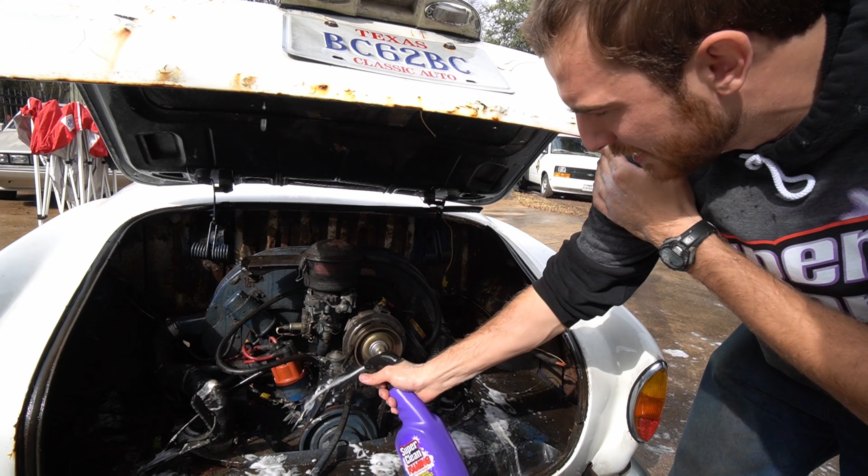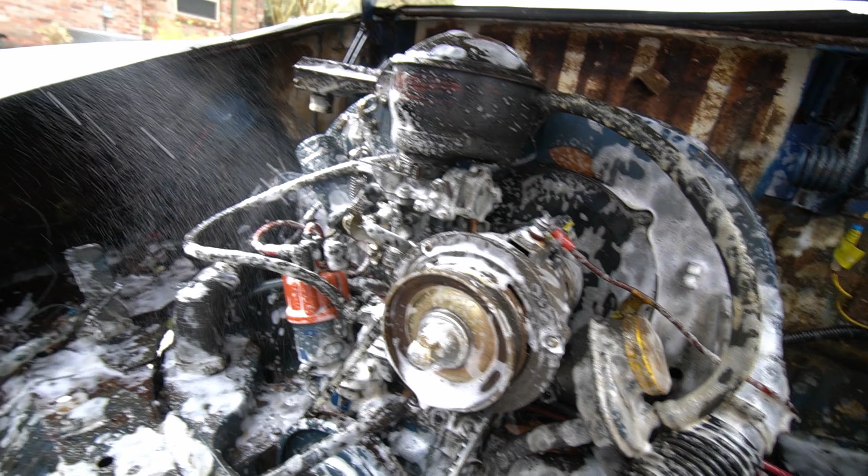Look at that. Tommy's alright to spray the motor. Do it. Don't go light. Let's just super clean the hell out of it, foam that bad boy up. It's foaming up, turning brown. See it? Yeah, that stuff is working. Yep. We're getting it super clean. We let it set for a second and then spray it down. That's coming off. Better air than that.

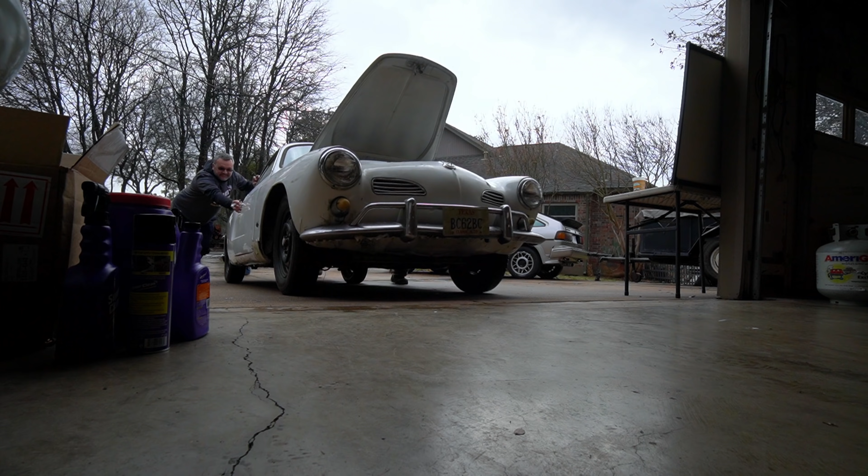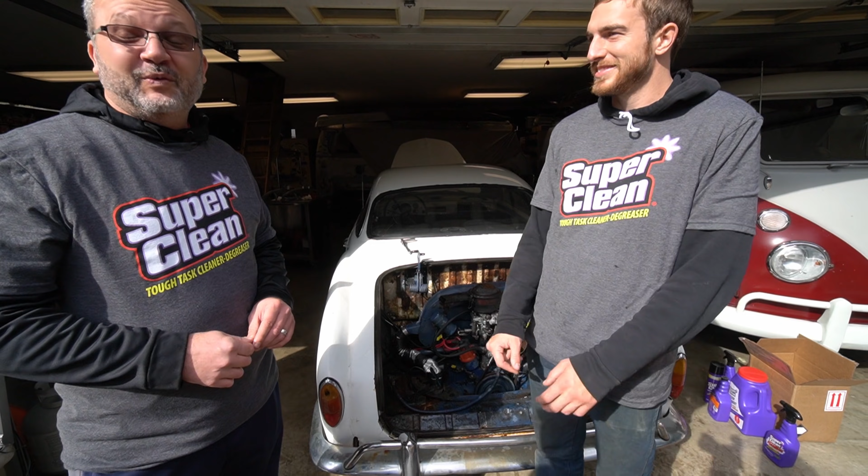It's been 20 years since it's ran. Is that what we figured out? Yeah. 20 years since it had a bath and since it ran. Yeah. We did give it a bath. First things first, we need to see if it's timed, right? No, I think the main thing that we should always do when you walk up to a car is just to see if the motor will turn over. So if we can turn it over a few full turns without any kind of problems, we're at least step one in the right direction.

So with this being aftermarket, I assume it's a 19 millimeter, 3/4? Yeah, something like that. And you could also just grab both of the belts and move it yourself. Yeah, maybe. Speaking from missing a digit, short finger, I stay away from the pulleys. Tommy's not a belt grabber person. So we are doing this why? We're going to see if the motor turns over, because if it doesn't turn over, we have a whole different problem.

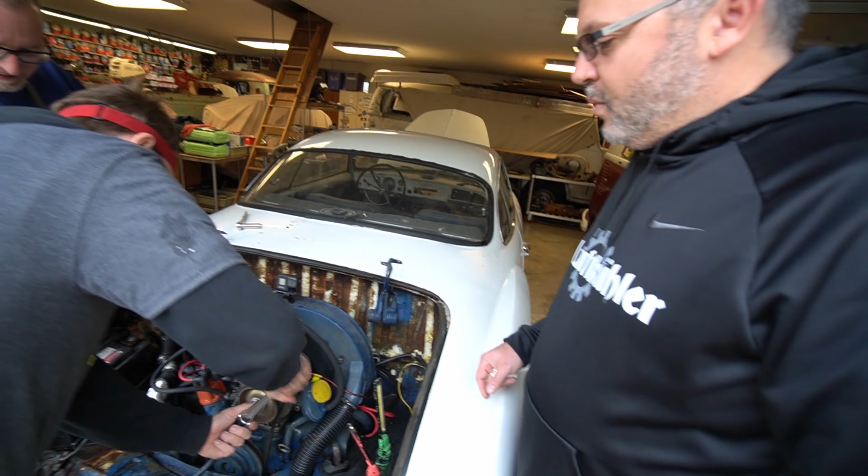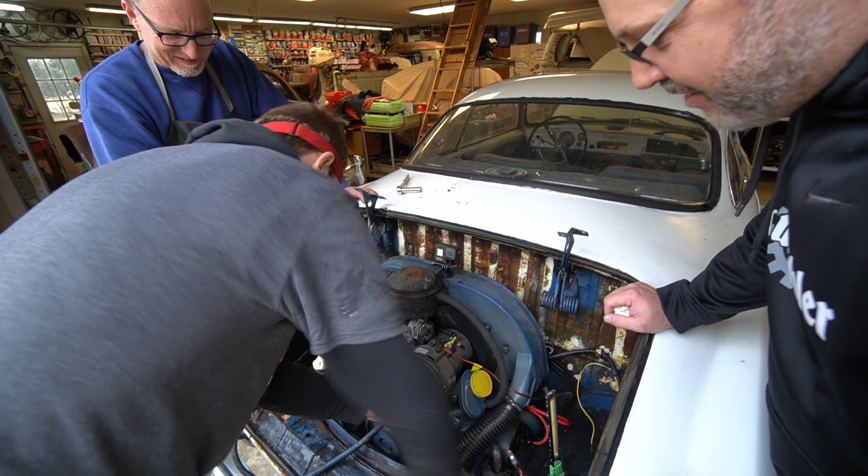So look at that. Oh, it's got compression. It does. That's always good news. We're doing really, really good right now. So Tommy, how do you know? What's the sign that it's got compression there? Well, it kicked over, so it built up the pressure, and then when it releases it shoves the... there it goes right there. So Jake's kind of cranking, all of a sudden it gets easy right there. So that's a great sign, isn't it? It is. So we're really good. We're moving forward. Let's go over exactly what it is we have here.

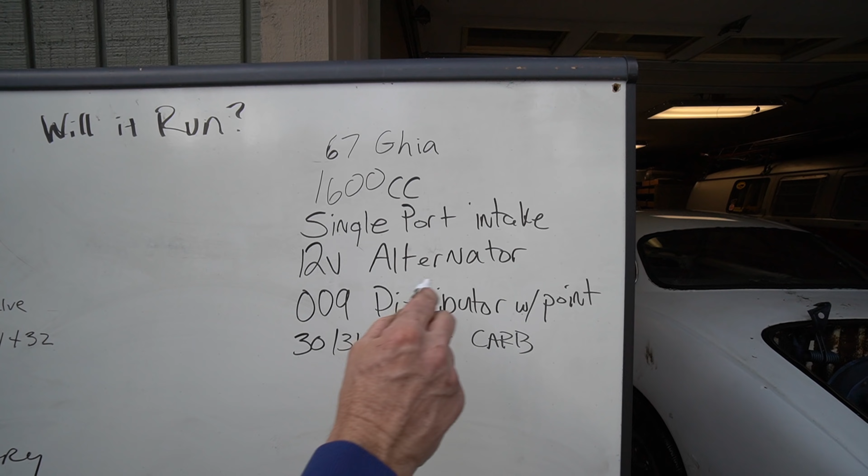We have a '67 Ghia, a 1600 single port, got a 12-volt alternator, 009s with points, and a 30/31 carb. So far we checked off rotating our motor. Next we're going to make sure we got oil in it, and we're going to see where we are with the valves, make sure everything's moving there.

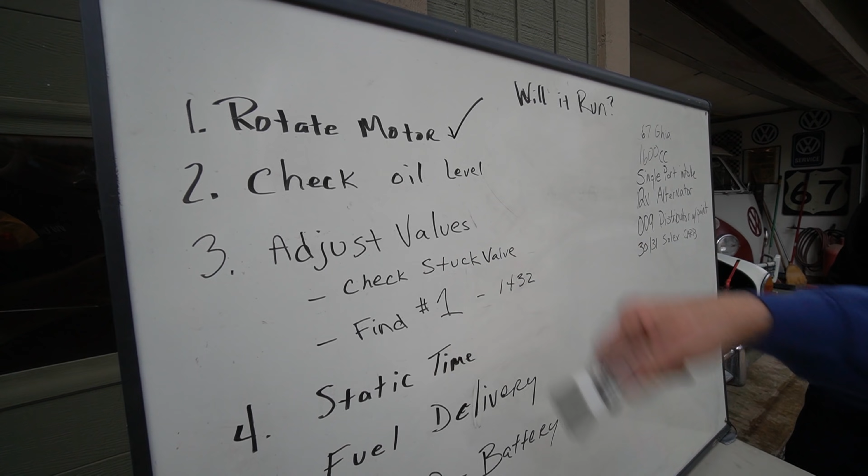Checking for oil, boss. Hopefully it's not brown. Whoa, it's got a lot of oil. It's got a lot of oil in it because we're up really high. We can wipe it up and see exactly where it's at. Holy moly. High school Jake level right there. Yeah, and it's also telling us it's relatively clean because it's not black.

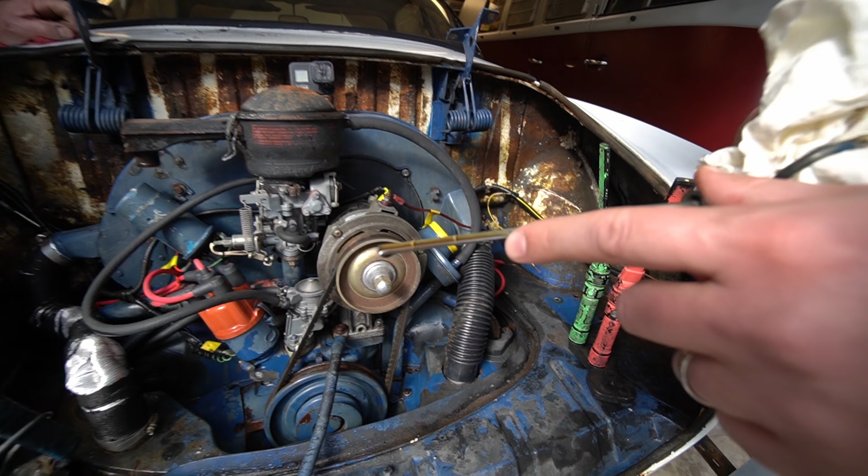And if it was black, that would be from the carbon buildup off the walls, and usually heavily scored or low compression motors will have a lot of it because there's a lot of blow by. And it's not brown or milkshake looking, because that means it didn't have water in it. Milkshake would have water in it. You could always smell it, see if there's a lot of gas that got down in there. You could touch your nose with it.

Tommy, hey, right here, Tommy. You got. Oh my gosh.

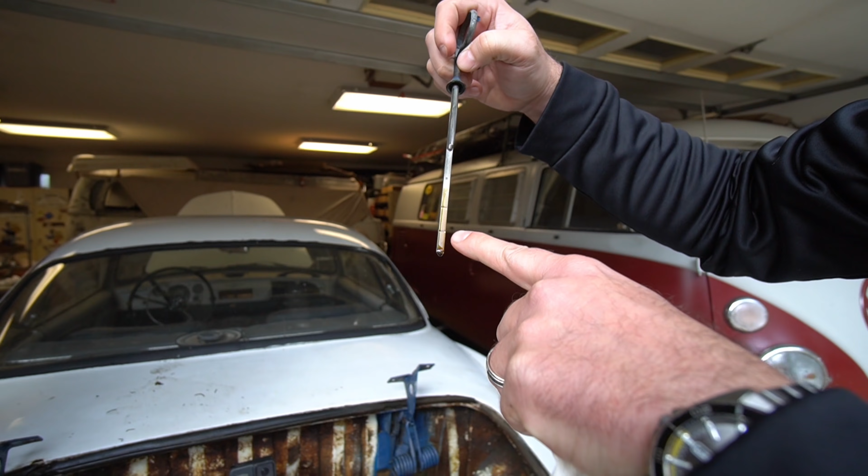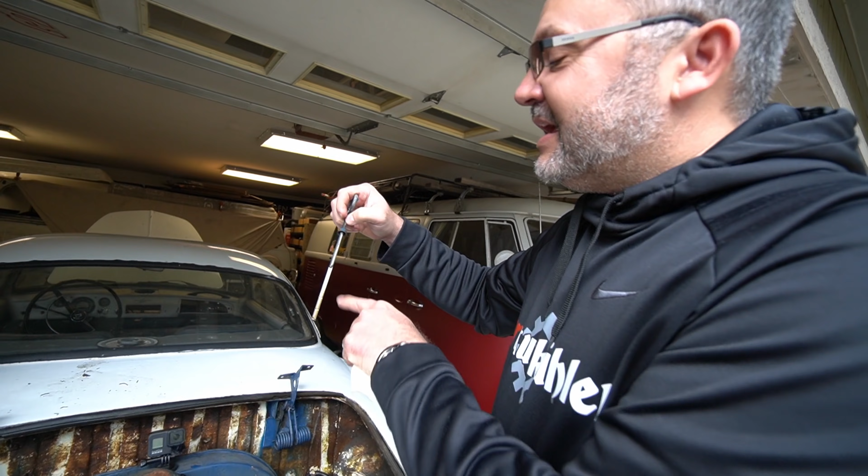So we're looking good. Basically, the oil has a clear color to it. It's not milky white and it's not over dirty, and it's high enough to where it's not too low. So here's low and here's high and here's where we are. So at the end of the day, it's got a lot of oil in it. Better to have more oil than no oil. Yeah, so that's a good sign.

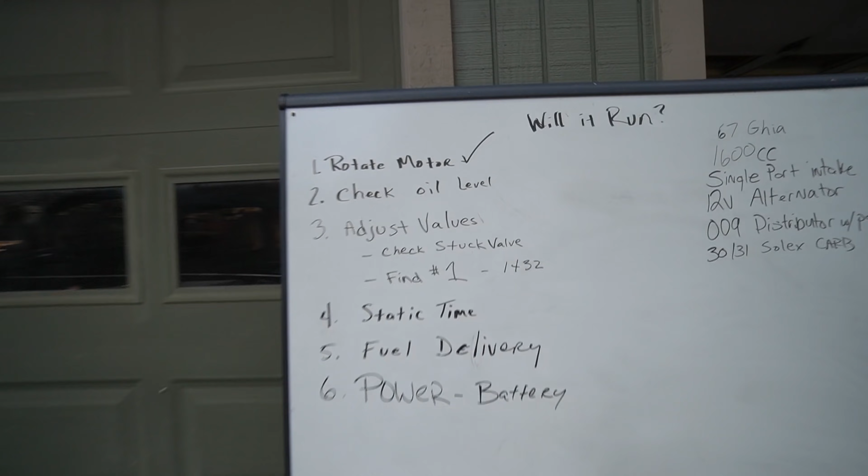All right, we're looking good. Step 2, we can check off on our box. Step 2, check oil. Wow, we're cruising along really quick on this. We are. We're like pros.

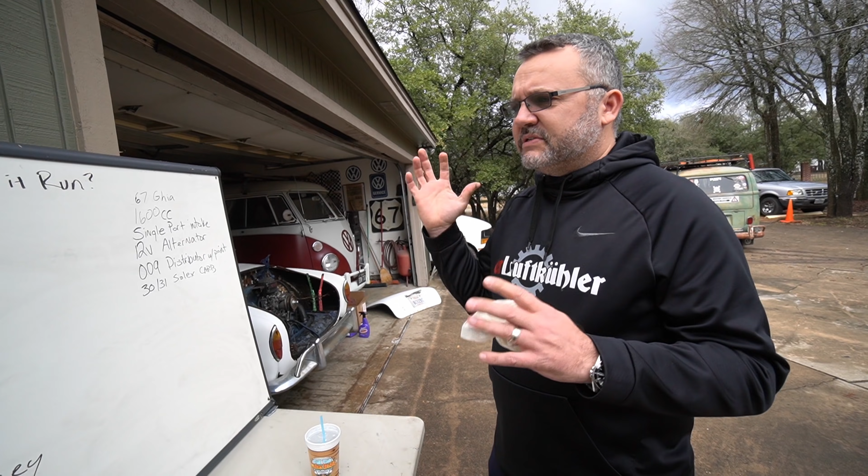So why do we want to adjust valves? We want to watch all the valves function, because sometimes there could be a stuck valve. And if it's stuck, we're going to have low compression or no compression in that. It could also be stuck and the piston come up and hit the valve, and that could be a problem. And then we're also going to show you how to always validate where your firing order is at and where to start from. And that is watching the intake valves open and close.

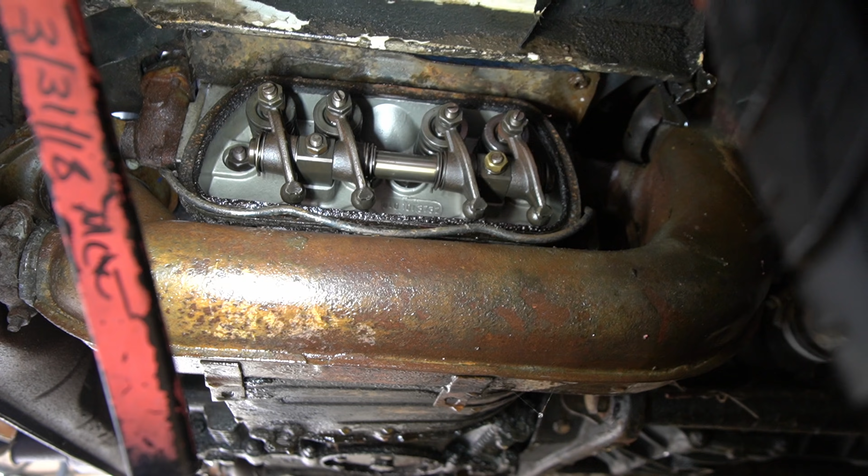Okay, so now we're under the 1 and 2 rockers, and we want to show you when everything's operating. Now here comes the exhaust on 2. Look, the exhaust on 1. Intake on 2. There goes the intake on 1 opening. Everything looks good. Yep, everything's moving free.

So what we want to do is we want to watch all of the rockers open and close, but we're going to focus on the number 1 right now. The number 1 intake is going to open and then close. And when it closes, we're going to watch the pulley, and we're going to wait for the top dead center to come up, and I'll show you where that's at. Because after the number 1 intake opens and then closes, the very next top dead center that comes up is where number 1 will be firing at.

So here's 1. Okay, there's 1 opening. And here's 1 closing. All right, 1 is closed. Yep, 1's closed. And then we come over here.

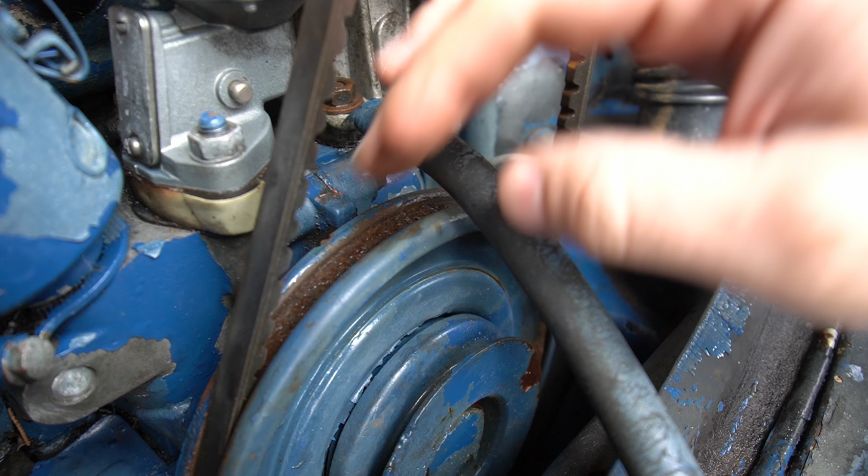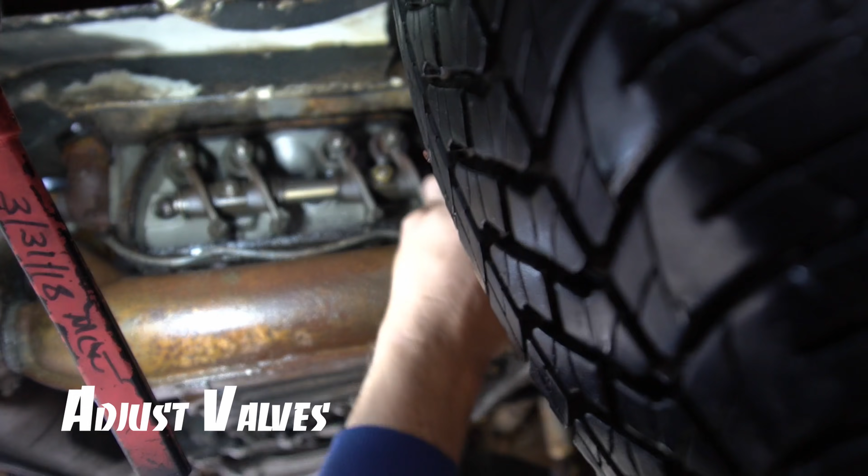When we found the pulley notches on this one, they're at 7 and 10 when they're side by side. We're not finding the top dead center. What we assume is it's going to be somewhere in this general area. So we're just going a little bit past 10, 7, somewhere in this general area. And so now we should check the valves. So let's adjust the valves. We have a 13 and a... Yep. They're pretty snug.

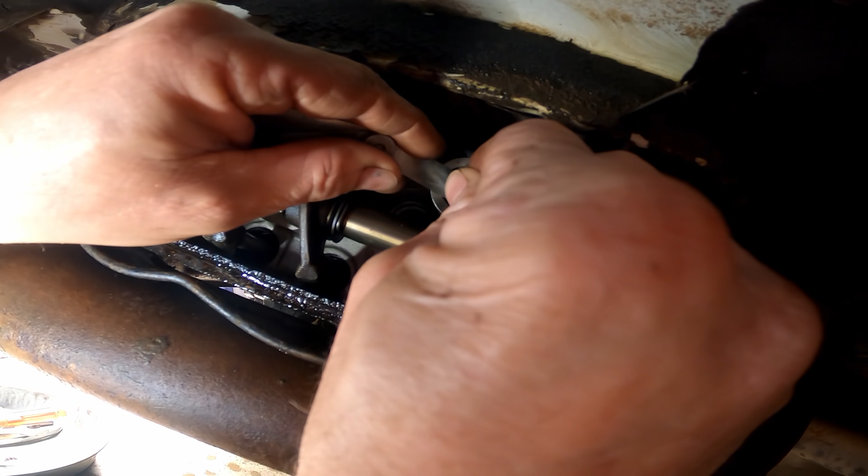All right, so Tommy's just turning the motor over until we get to 2 now, and Gary is adjusting the valves. Why should we do what we did with the valves just now? Running the valves. So they're going to make sure we find where number 1 is at for sure, so we're not guessing anymore. A lot of times you'll walk up to a car and you move the distributor around forever and you move plug wires and people are just saying, oh, I think it's here. And before you know it, you've turned the distributor forever.

Well, why don't we just validate it in 2 seconds, which is very easy by watching the valves, the intake valves open and close. And we also found that they were a little bit tight, and we could have been trying to get this thing to run, or anybody could be trying to get any car to run, and we don't have any real good compression.

So if we're going to run them now, it doesn't take very much time. Just to go ahead and get that portion out of the way. Plus, if you're ever running valves, you always want to do it when it's cold, so now's the best time to do it. So we haven't even started with anything else, but we were just validating one step in the beginning, and then we don't have to worry about it anymore. It just knocks an unknown off the list, so to speak.

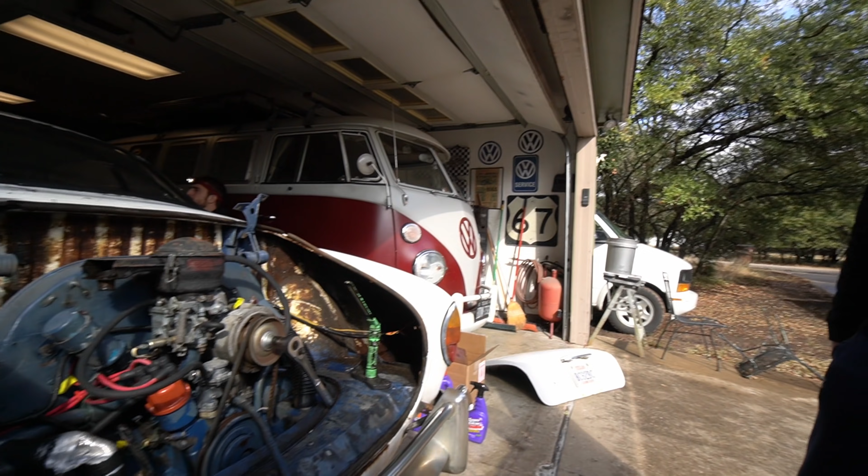And we could get in there, and I mean, you could sit here and try to start this thing, and if you don't pop open the valve covers, I mean, they have rockers in there. I mean, you never know, right? True. I've seen that before. Yeah. We've done 1 and 2, and we're going to move over to 3 and 4. Right? Yay, 3 and 4. This is always easier on that arm.

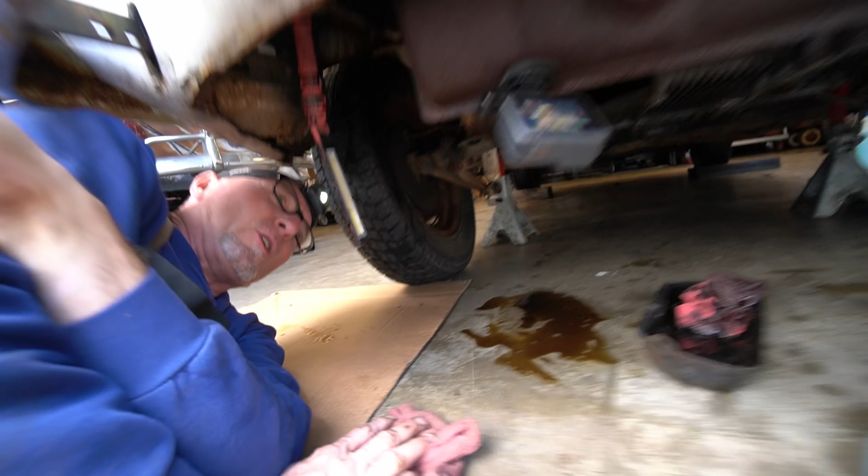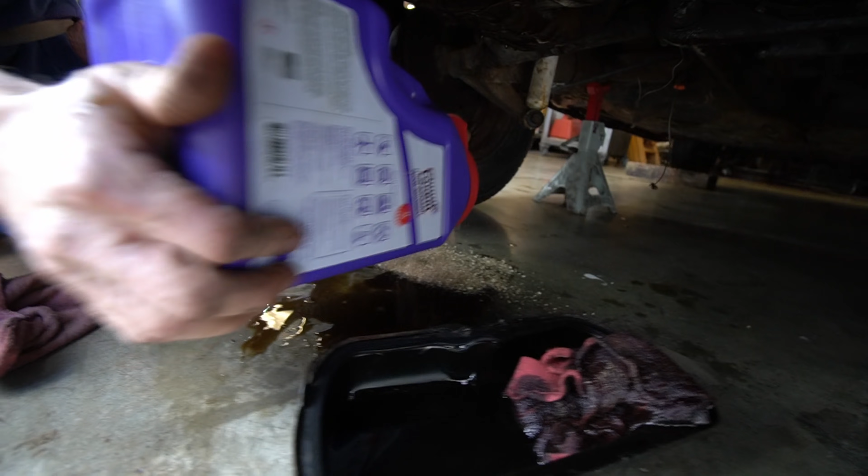Gosh, Matt Jackson, if I only had some super clean floor absorbent, this would be an easy cleanup. Do you know where there is any? Slow motion shot. Look at this. I guess you could slow it down. It's like kitty litter, only fancier. Whoa! You got an oily GoPro. Oh, I'm glad it was on the back, not the fur. GoPro absorbent.

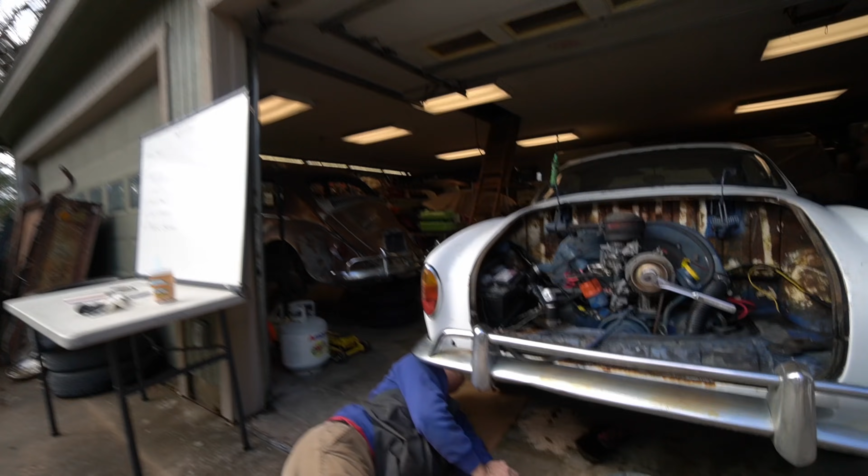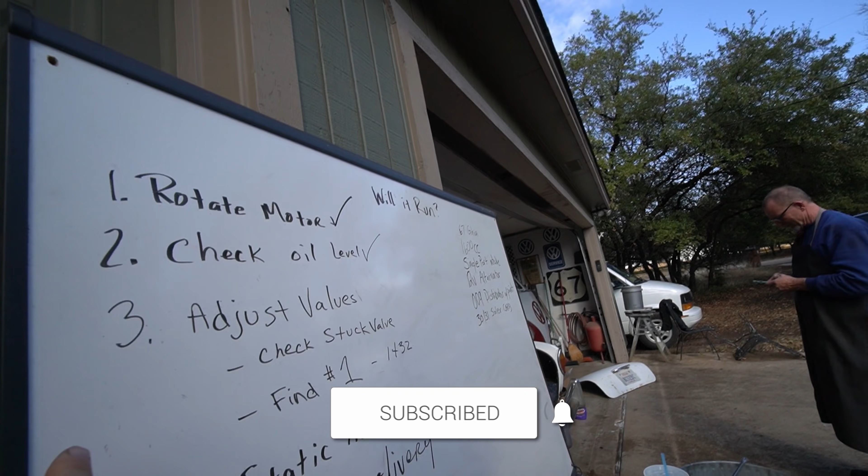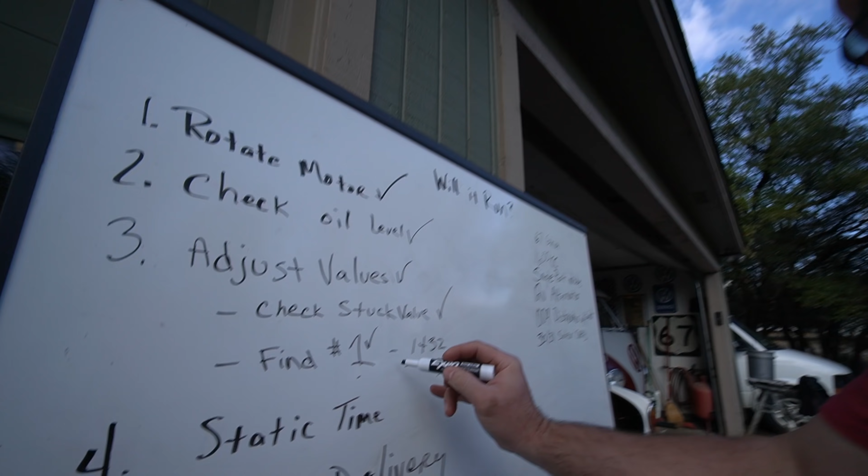Tommy, we've adjusted our valves. We're done with step 3. We made sure that there were no stuck valves. We found number 1, and we know that our firing order is 1, 4, 3, 2. So we found number 1, and we know where number 1 is on the thing. So we're gonna check our wires to make sure number 1 is in the right hole.

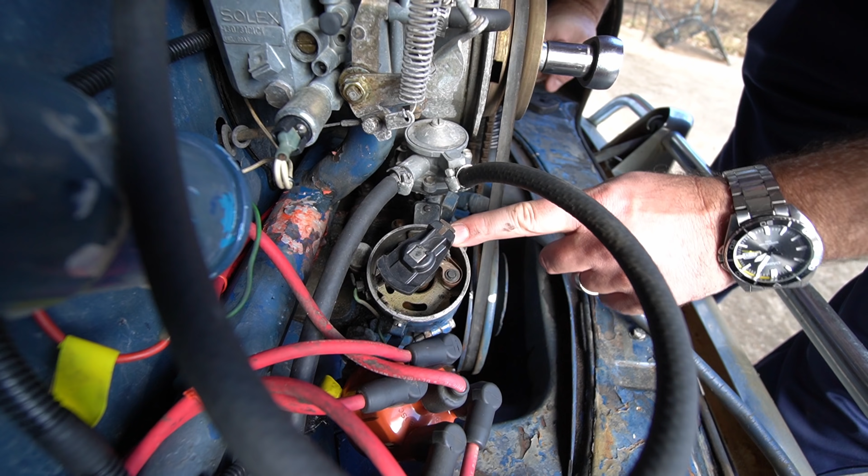So in most cars, number 1 should be firing in this general area. There's a notch right here on the distributor. It doesn't really mean anything, but it does tell you this is in general the area where number 1 should be firing at. However, on this car, the distributor gear itself is 180 out. So we know that number 1, when we were messing with it on the valves, we found that number 1's in the back. So we want to make sure our number 1 plug wire starts on the back side of this.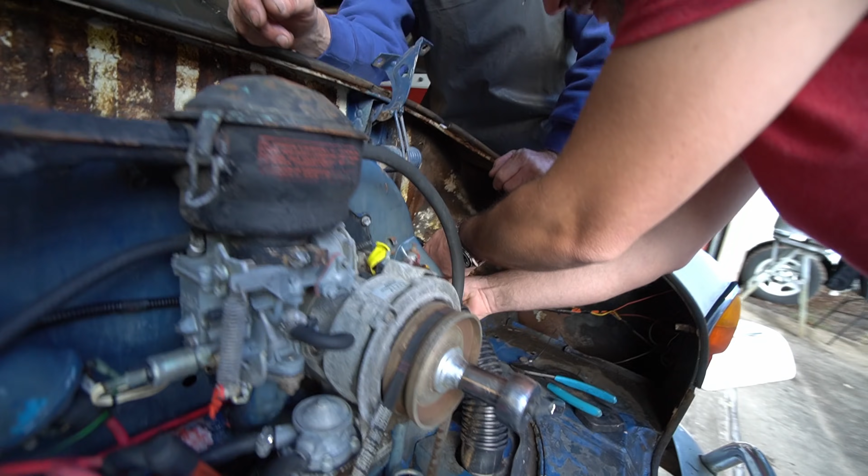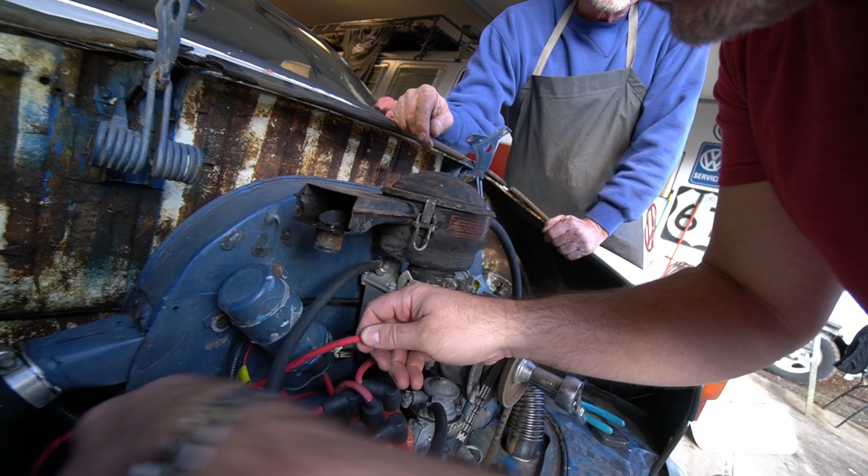Okay. So we know number 1 is firing back here. So we pull on it and we trace it. Number 1 being the front side of the car on the passenger side. And so it's right here. This is number 2. And then this should be number 4: 1, 4, 3, 2. So this we validate as number 4. And then this is number 3: 1, 4, 3, and 2. So we know 1, 4, 3, 2.

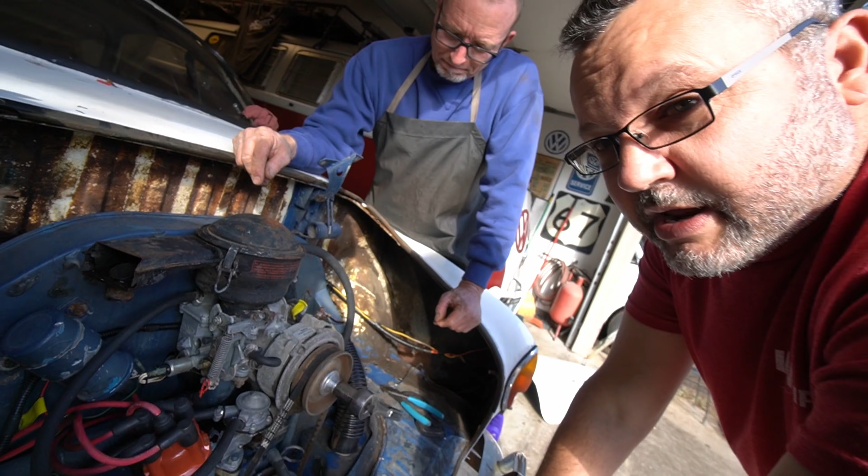There should also be another statement made on these cars. Number 1 and number 3 are always top dead center. There's no ifs, ands, or buts. And number 2 and number 4 are going to be bottom dead center on the pulley. So you should always know that no matter what, if you're at top dead center, the rotor should be facing the number 1 wire or the number 3 wire, no matter what.

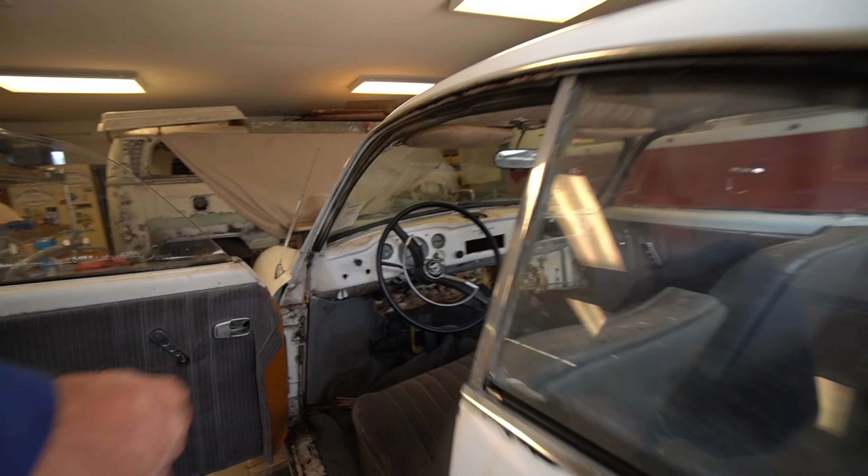The next step is to get power and see where we're at with power supply. Dun, dun, dun, dun. Power. All right, so now we're checking for key power. You got to turn on the... Here, hold on. I'll show you how to do it. You ready? Up. We have lights. I have generator and oil pressure light. And look, we have power. Do it again. We have power to the coil. That's all we validated right now is power to the coil.

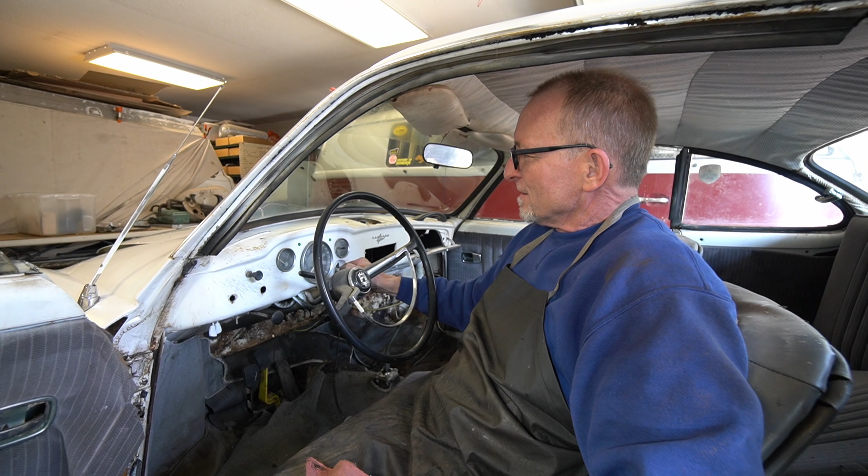All right, cool. So we know our starter's working, so that's good. So one thing that we're going to do is if we've got power to this side of the coil, we can see if we've got spark happening by putting this test light on the negative side of the coil. And when he tries to turn it over, we should see some flickering happen here, which says that we should have some spark happening. Okay, y'all ready? We are ready.

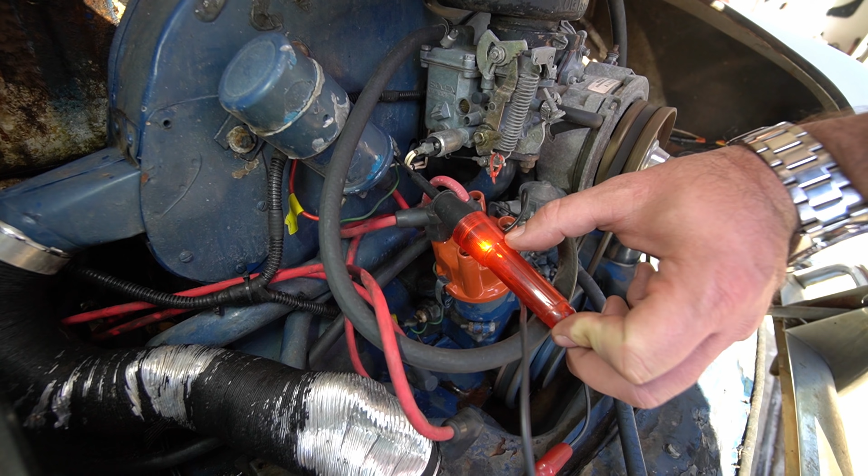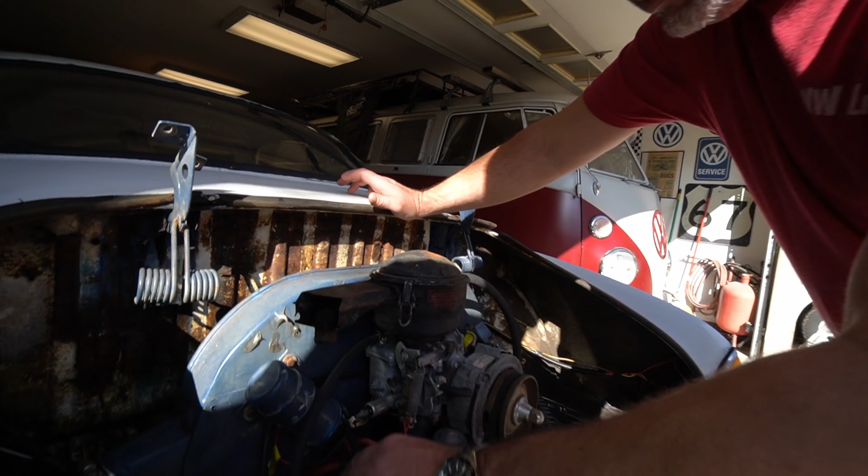So you see that? You see how it goes? Do it again. See how it sort of starts to go long ways? We want to make sure that the points are clean. They probably are a little dirty right now, which is why they're not getting a full solid strike. So is it flashing a little bit? A little bit, but I think we should run some sandpaper or something just to clean up the points.

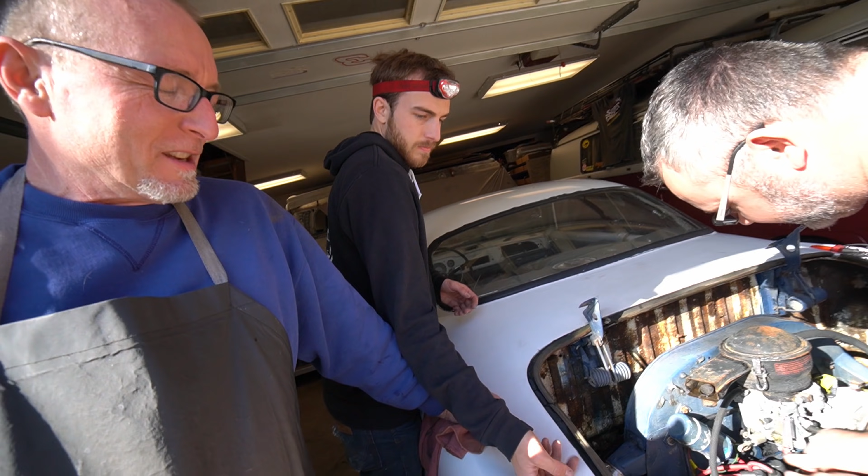When we turned the ignition on, we got the generator light came on, and the oil pressure light came on. That's kind of cool. And then, as you heard just now, we're getting it turned over, and then we're getting power to the coil. So now we're just going to check the points. Chances are they may be closed up. Well, you can tell they're a little old, a little corroded in there.

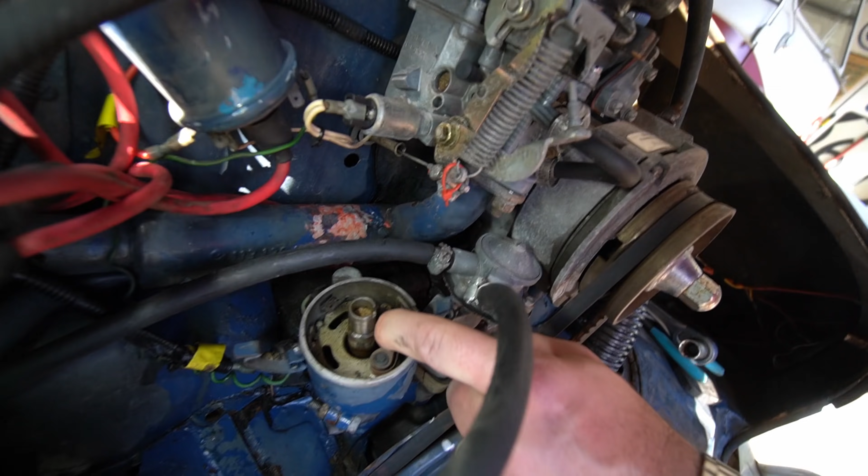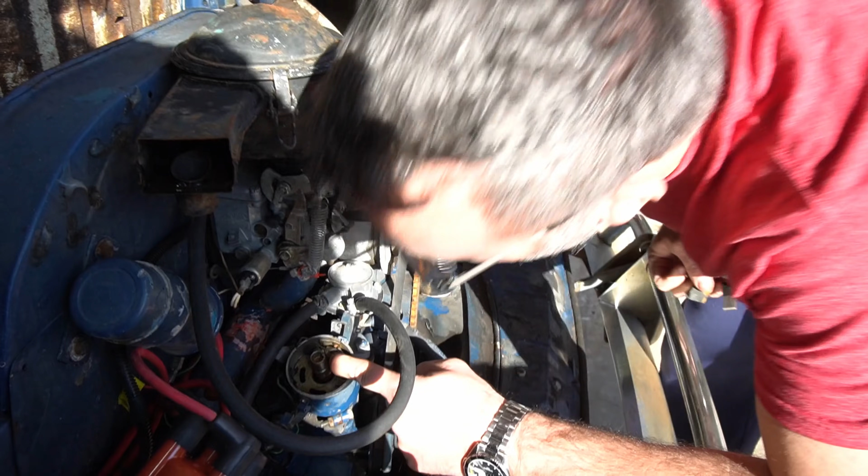So what we're doing is we're just using a feeler gauge, some sandpaper wrapped around it, some really fine grit sandpaper. We'll just pull back the points, stick it down in there, and then just sort of hold on to it and move it back and forth. This is just making sure that we get a good connection here. All right, points cleaned, rotor going back on, and then the cap.

Nice. Okay. So now I'm gonna turn it over, and we're gonna see that light go flash, flash, flash, flash. Yeah, let's watch it flicker again. Let's see if we get a little better flicker out of it. Ready? Yeah, go for it whenever you're ready. Oh, see? Go do it again. Keep going for a while.

Okay. All right, so one thing that'll get you every time, if these solenoids are not functioning, it won't run. It'll stop fuel delivery. So what we're going to do now is click on the accessory power and make sure we hear it clicking, right? Yep. All right, so let's see if we can hear it clicking. Are you ready? You hear anything? Nope. All right, Matt Jackson, can you tell me why you don't hear anything? Because it's not getting power and it's not opening the little plunger up.

So what we can do is take that out and just cut off the plunger, right? You could go that route, see what's going on. Let's just do that because that's how we roll here at VW Life. It might be that they didn't get no power from that. It looks kind of fancy wired up. Let's see if we got power. I'll see if you're getting power over there first. Keep the key on. Key on. Here, I'll just stay in there, Pops. Key on. Oh, it's getting power. Yeah, it's getting power.

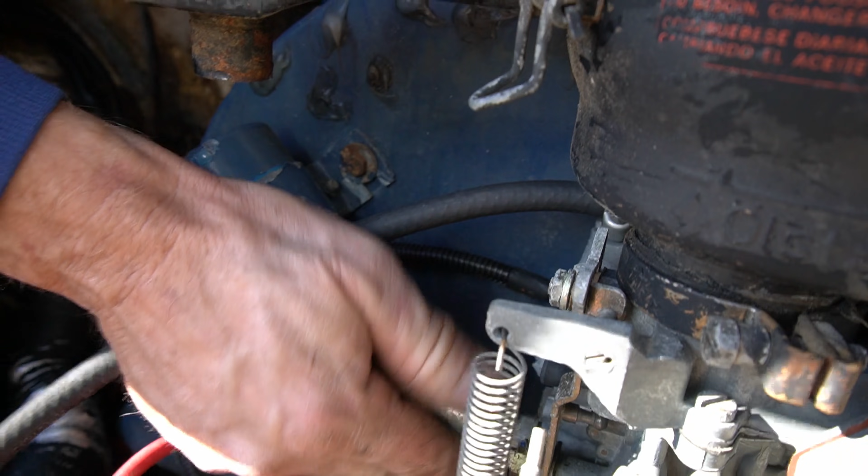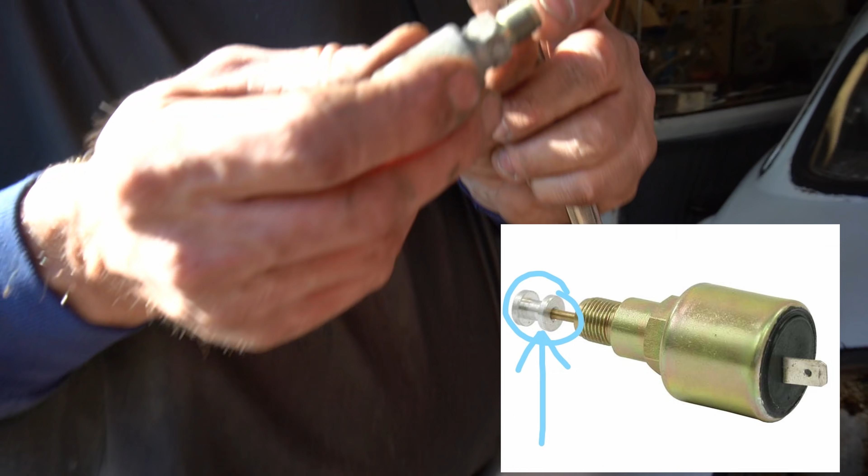All right, Gary, show them how to cut off the plunger. Maybe it's already cut off too. Do you think it's cut? I'm gonna guess it is already cut. Yep. Yeah, it was already cut off. So what they did is they cut. There's that little plunger that it's just a solenoid. Instead of replacing this in the first place, the POs just cut it. Yep. Which is what we were gonna do. Yeah. And so in reality, this cable doesn't even need to be plugged up there.

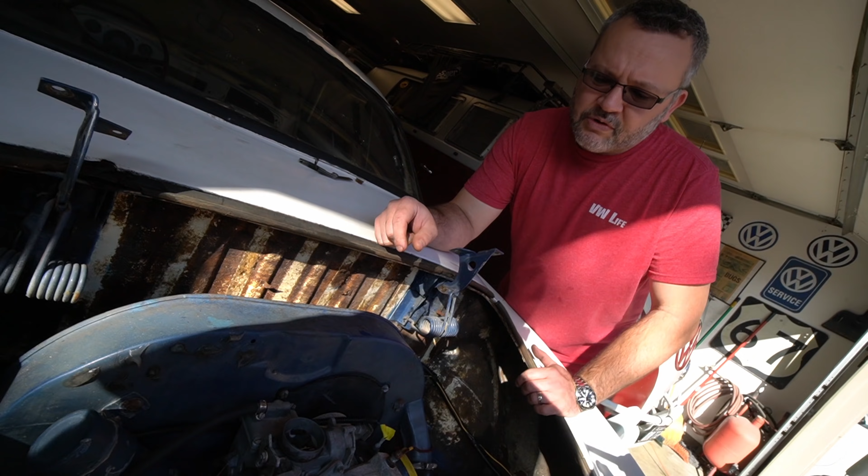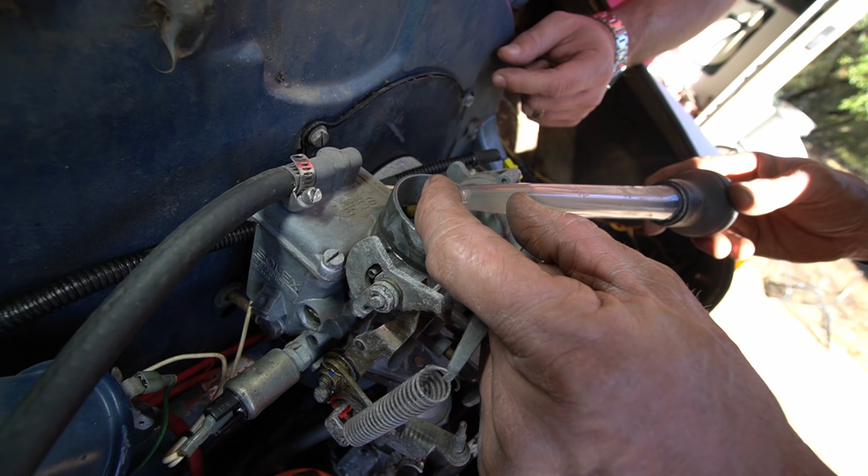So what we're doing right now is we're going to try to put fuel in the carburetor and make sure that it's squirting to at least give us some fuel delivery to see if we can spark that fuel. Cool thing is on these Solexes, this is a breather tube for the bowl. So this hole goes directly into the bowl. And so from the outside, we can use a syringe or a plunger, which we usually do, and try to get it right over top of that and fill directly into the bowl.

So a lot of times people squirt it down into the larger area of the carburetor, but you're saying this is better because we're actually filling the bowl. Well, now we're getting the carb to function a little bit too, not just getting the car to start. Filling down the throat, going down the larger part, does nothing but get that gas burned off. All right, ready? Yeah, go for it.

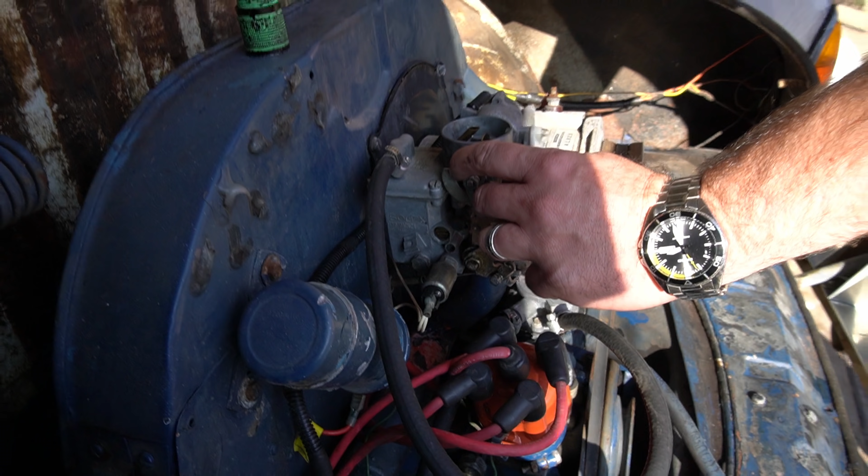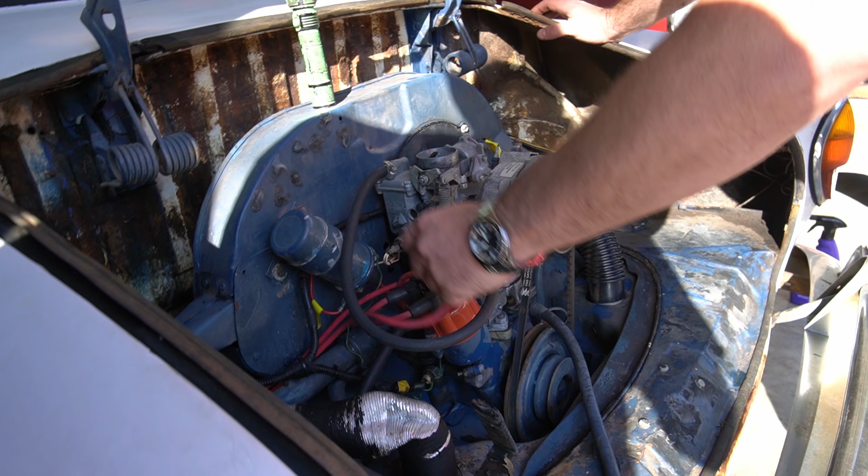Hold on. There's smoke coming out of the exhaust pipe. Checking for spark. Yeah, I want to see if there's a good spark coming. Oh! We have a very weak spark happening right now. The moment of truth is about to come.

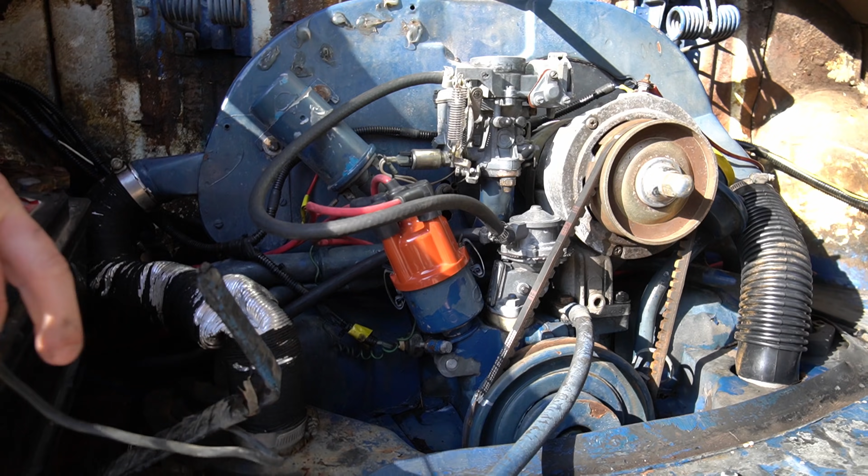We've got spark, we got fuel in there, and we are going to see if this little jewel will fire up. So the '67 Ghia, here it is. Jake is on the ignition, Tommy's on throttle, I'm on camera. Fire in the hole. Yeah, try it.

It runs! Yay, we did it! Hey! Good job, boys! Of course, it's got an exhaust leak. Yeah, it has a little bit of exhaust leak, and the carburetor is not functioning at all. But we did get it to squirt, which was nice, so that we didn't have to keep pouring fuel down it. So what do you think?

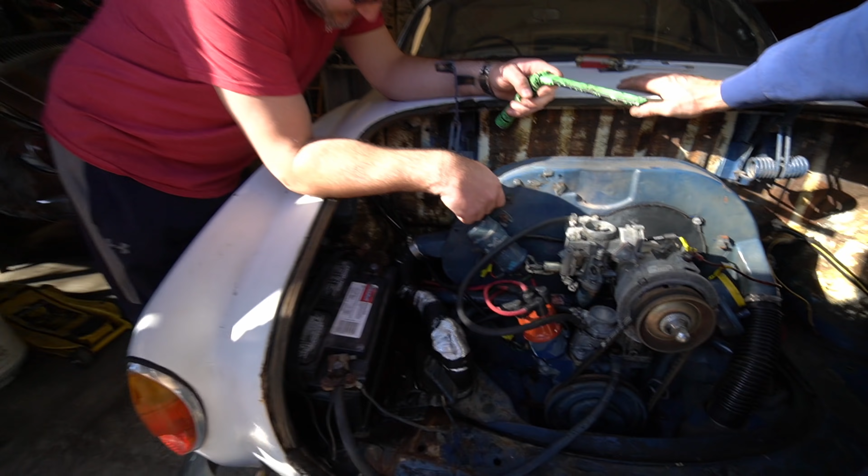Well, I kept having to pump it because it's not feeding. And then of course we had some weak spark, but it started. This needs to come off and really get cleaned if we want to be happy with what we're doing. All right, so now that we know it runs, we're going to take off the carb and give that a once over, clean up the spark plugs, and reroute our fuel.

Is that the plan? That is the plan. And then we're driving it. Yeah. So we got it to start. Yep. Now we're going to try to get it to run. So will it run? Yes, it will start. Now we got to get it to keep running. Then we'll take it for a maiden voyage.

All right. So basically what we did is we got the car to run, or at least start, right? It's not running, but it's started. So now we're going to see if we can get it to hold an idle and everything else. So the one thing that everybody should be aware of is that taking the carb apart is not rocket science. Most of everything that you take off has one place to go, and it goes back where it came from, right? So you can't really get this stuff mixed up too much.

And in general, with the way phones are these days, you could snap a couple pictures as you go through it. And as you take it off, you'll say, oh, that's where it goes back in there. So don't ever be afraid of a carburetor. It's not the end of the world. They're very, very easy. So just take them apart. What we want to do is make sure all the galleys are functioning and everything else. We're going to give the car the best chance possible.

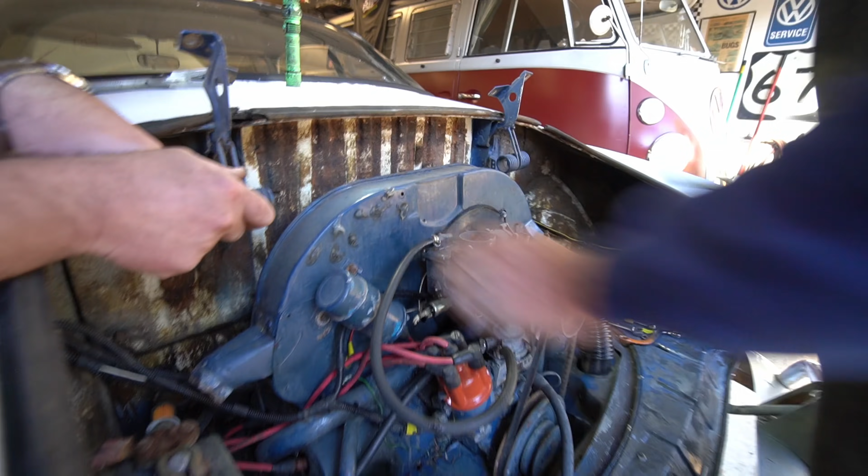We did try to spray some stuff down in there to dissolve out some of the chunks. So that's what Tommy's doing here. You just took the cap off, took out all the brass fittings, and you're just going to clean it, right? Yeah, just giving it a quick once over. Easy peasy. Okay, so the carb's going back on. We got a new fuel filter in place, and we tightened up that exhaust leak that you might have heard earlier.

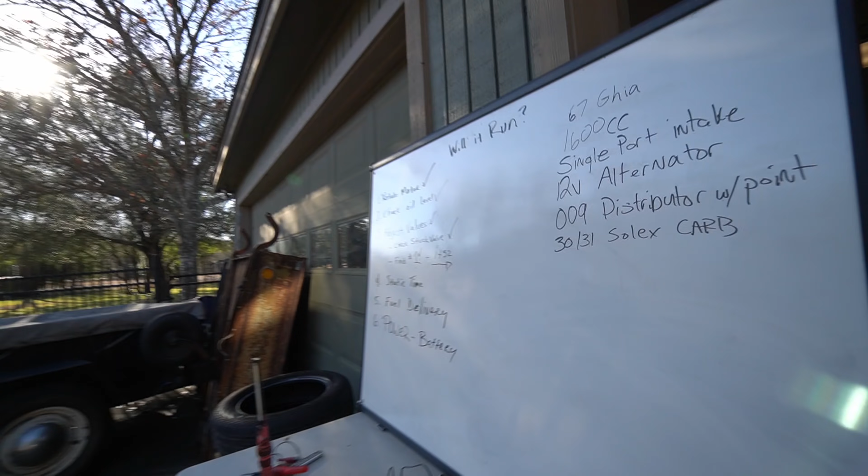Did you say something about static timing? So number 4 in here is static time. Do we want to do that? We could have, but when we adjusted the valves, we saw the number 1 was pointing very close. So that got us in the ballpark, and we weren't going to have to chase it down. Because it's a 009, we should actually time it with the timing light now that we're running. So for now, we're good.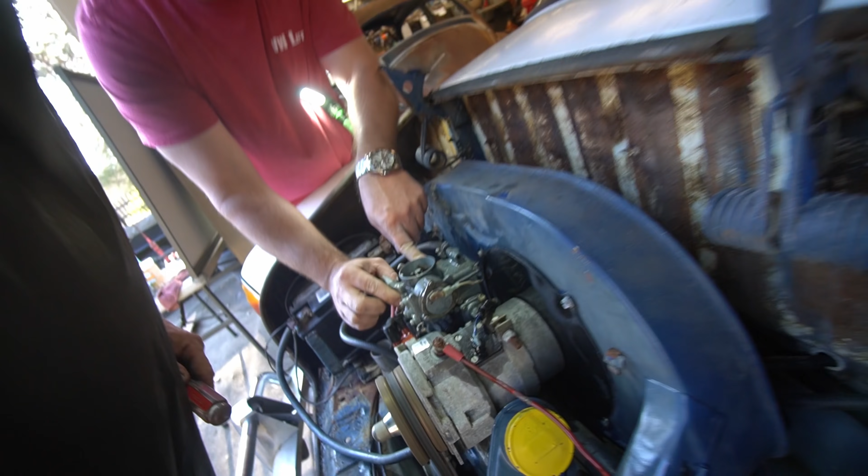Right, well, we're putting some air in the tires and we're gonna try to give it a run around the block. We'll see what happens. It's not really idling that great. Now the throttle's sticking, so Gary's just gonna lube up the pedal assembly. It's got a little bit of crustiness going on.

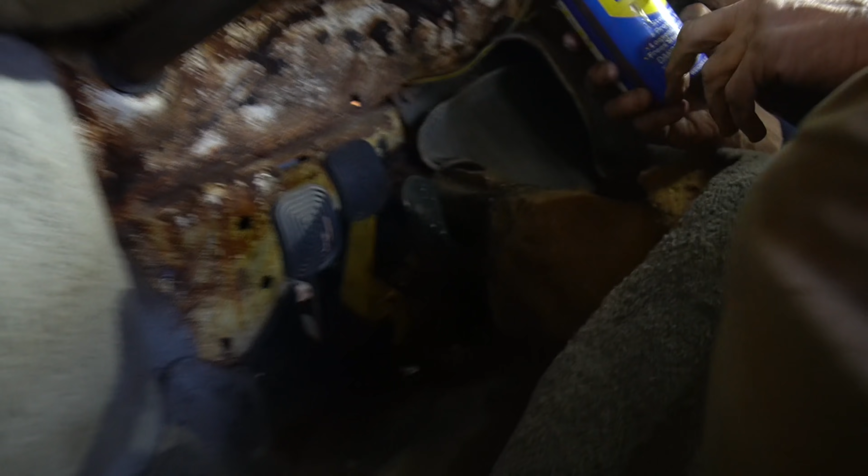WD-40. Stops squeaks, protects metal, loosens rusted parts. We're on part 3. Frees sticky mechanisms. Part 3 and part 4 here. Start it. Okay, no ground.

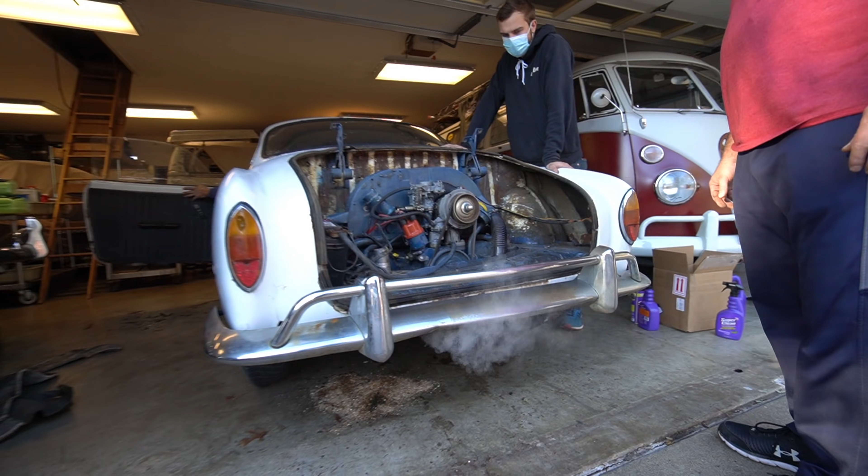So it's either like a bad disc or you're not fully being able to disengage it. Yeah. So we'll go into gear. So you could drive it. We could just start in first and drive and rev match. Yeah. So do you want to do that? You want to back it up and get it straight? Yeah, let's get it out of here first.

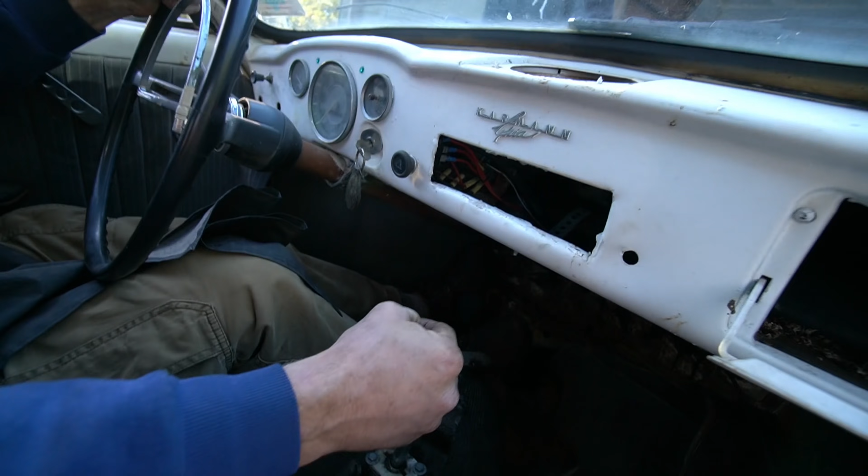Let's push it back out of here. That way we start it in first and we'll just go. All right. I mean, and then it's just like, that's the plan. Yeah, you could shift through the gears. Yeah. Don't let it hit down there. Oh my god.

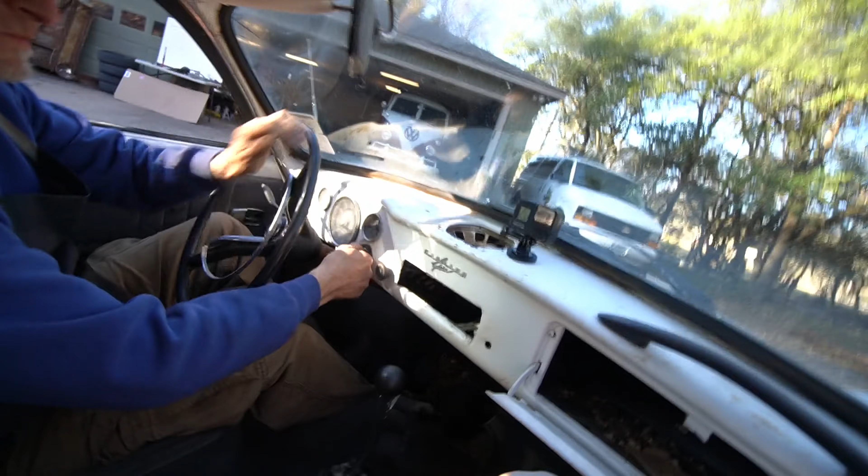Here we go. Are you gonna start it in gear? Yeah, you're gonna have to because we ain't got no clutch. Oh my gosh. That poor starter. Y'all ready? Yeah. So you can put it in gear when it's stopped. Yeah. All right, here we go. It wasn't in gear, huh? Yeah. So you're going down for first?

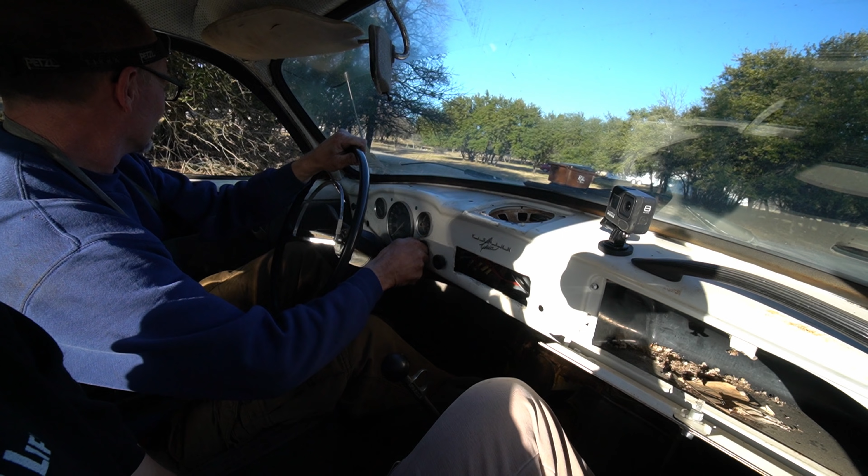Wow. Yeah. Oh, come on, baby. It's driving! We're driving! Oh my god! We're driving! What are we gonna do now? We got no brakes. We can't shift. There's no brakes? Hey, what's that sound? It's probably on fire. Oh, I can see out the rearview mirror. Oh my god, we're driving!

All right, Matt Jackson, we're getting ready to have a really big problem here. Wait, there's no brakes? There's no brakes. We're gonna have to push it home. You have to coast around the circle. I can't. We're gonna have to make a really tight corner. Alright. Just go. I got no brakes. You got no brakes? No, I got no brakes. Oh shit, my door!

Floor! I got it, floor! It's floored. It's floored. Oh, it's a car! Stop! Stop! Thank you for that. Oh, now we're going. Oh yeah! Woo! No brakes, and we can't shift it. And my door doesn't close. Oh, we stopped. We stalled. All right, try the brake pedal.

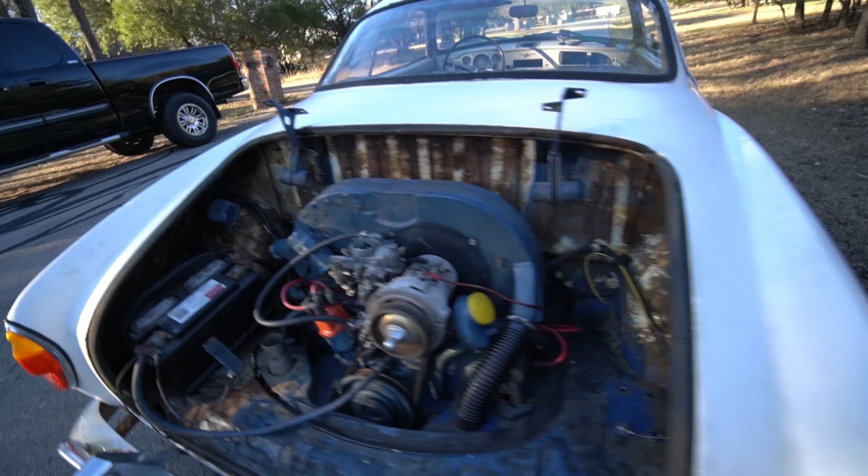There's Tommy. Oh my gosh! Get me out! Get me out of there! Looks like a $5,000 bill to me. The rest is up to you. All right, VW Life, VW Ghia for sale, '67.

Oh my God. Matt Jackson, we're going to be in serious trouble now. You didn't have any brake, right? Oh no, there's no brake. Does the brake work at all? E-brake works. We hope you liked our antics today. We survived. I'm going to leave it at that. We got it running. We did. It runs. We went through a nice little process to get it running. And then stopping was another conversation.

Making hard turns was apparently awesome. Was shifting supposed to be a part of it? It was not on the checklist today. It wasn't on the checklist. Okay. But we did check it off. It doesn't shift, so it needs a little work. It does need work, but we got it running, and we hope you guys learned the basics on how to get a motor running after 20 years of sitting. Yeah, I think that's the best part of the day, guys. It had been sitting for 20 years, and that thing runs. So, hooray. That's a huge victory. But it was a great day.